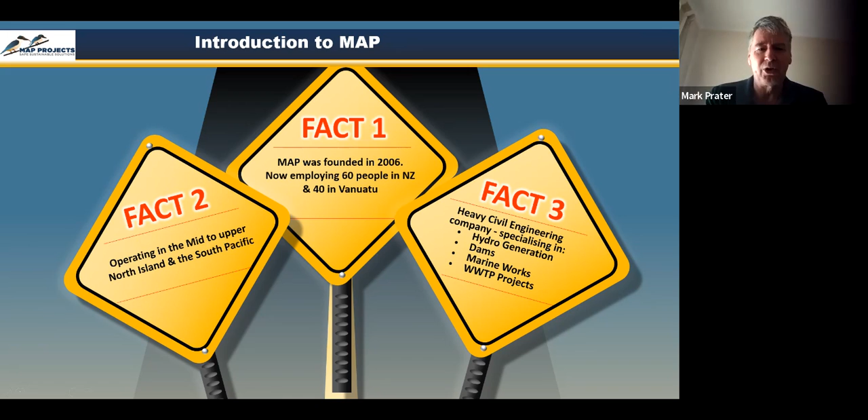Very much broad-based, heavy civil engineering. We don't build roads, we don't generally build subdivisions, but they are part of our skill set if we need to, because they're part of a larger project.

Andrew, who's our commercial manager, has put together a pretty good explanation of where MAP's heading over these next slides, and some of our core values, and what we're trying to encourage throughout the business and get better at year on year.

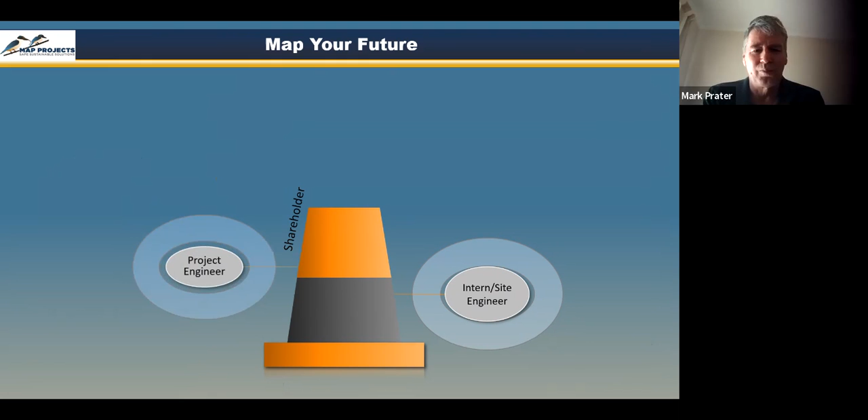I can talk a little bit about this if you want, Mark, in terms of the career progression we probably look for with a graduate - starting as an intern with holiday work, or coming on board as a graduate engineer or site engineer, then assisting on projects, assisting the project manager, learning basic project management skills in terms of plans and planning, set outs, materials, contract documents, reading and understanding those, day-to-day management of the site, and controlling the work crews and learning off them as well.

We expect our new engineers to muck in and help out and work on the gear, work with the guys, understand the practical side of what they're building and how that marries up with the technical knowledge. We think that's quite important going forward, so people can really understand how we build things and how the work crews actually put these things together off a plan.

Leading health and safety is a big element there, making sure the quality of the job is maintained with the systems, and then preparing reports and all that sort of stuff. Throughout that process, it's just getting more experience over the years, or months I suppose, depending on how quick people move and how quickly they pick things up.

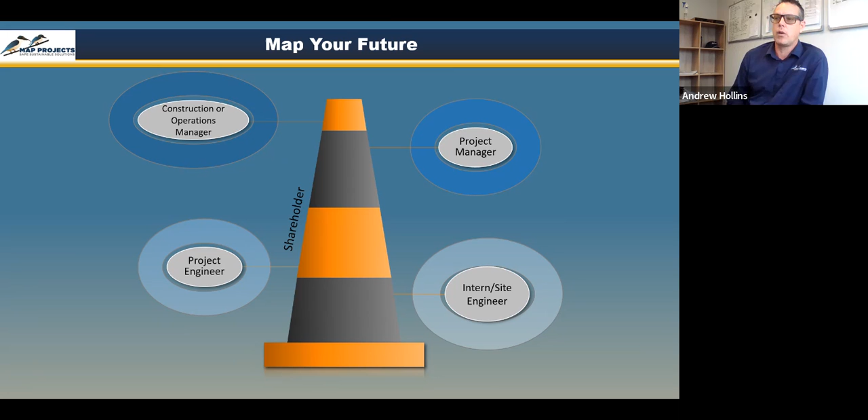I started as a site engineer back in the UK, then came on board with a company over in New Zealand, Higgins, building roads for 10-12 years as a project manager. Worked my way up through that system to construction manager, then construction manager here at MAP, and now commercial manager. There's a lot of different avenues you can follow, but project management gives you all the basics that cover those roles and a real good grounding to step into anything else as your career develops.

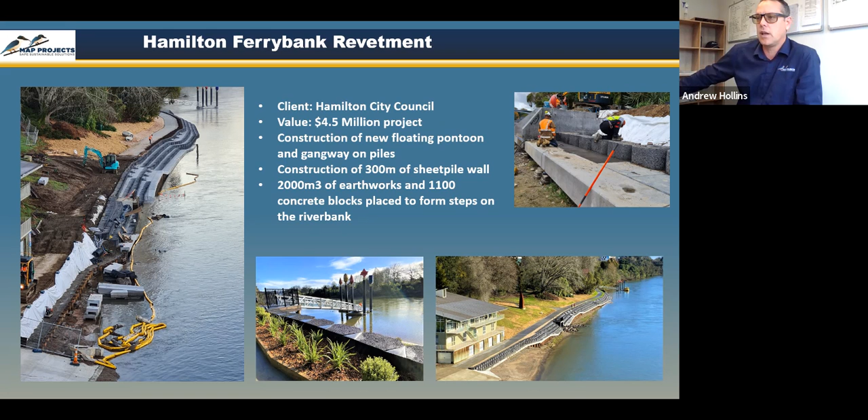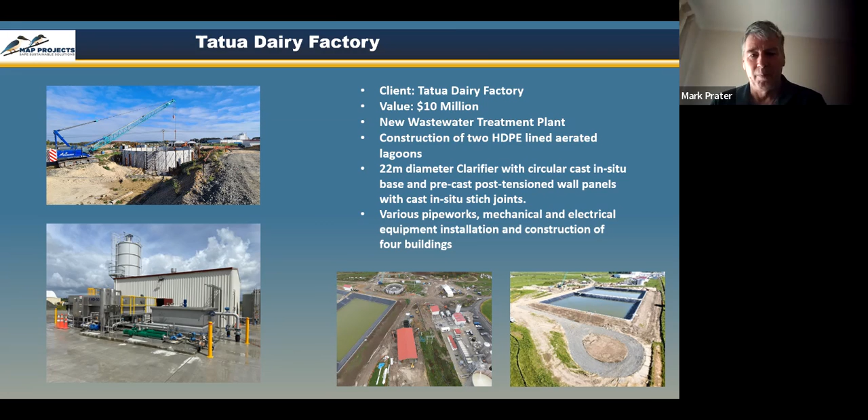Okay, and we've just got a video here of one of our young site engineers talking about his experience with MAP, and how he's come through the ranks, I guess - hopefully it'll be quite relatable to some of you who might be interested in coming on board.

Hi, my name is Patrick, and I'm currently studying civil engineering at the University of Waikato. I'm working part-time for MAP Projects while I'm also studying.

While I was on that job, the project engineer / project manager knew I had done fairly well in school, and I was looking to go back to university, so he started giving me little engineering-ish jobs to do while I was on that project, like reading the plans, setting out GPS work, as-builts, QA, and that sort of thing, as well as pricing up variations.

So towards the end of that project, I was working pretty much half-time on the ground and half in the office, learning all about what it's like being an engineer and a project manager.

After that, I moved over to Aotearoa to work on a dairy factory extension. I did pretty much the same sort of thing there, and then went off to study at university.

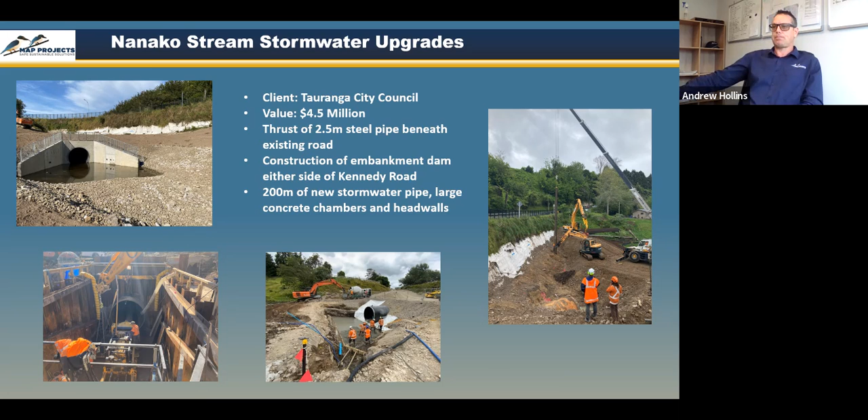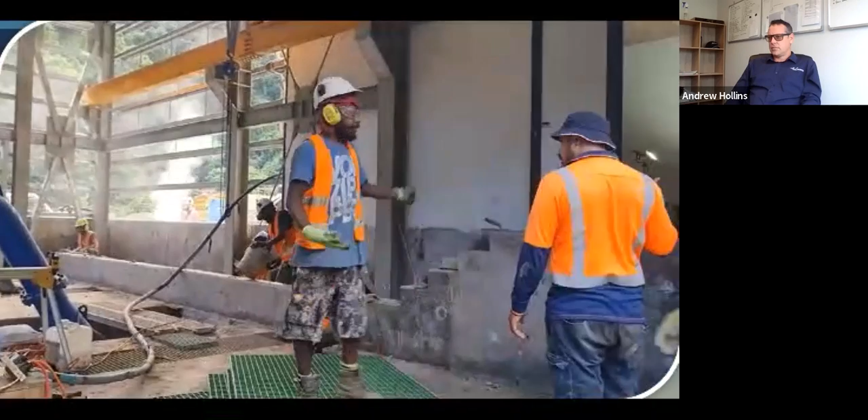Hi, my name's Baden.

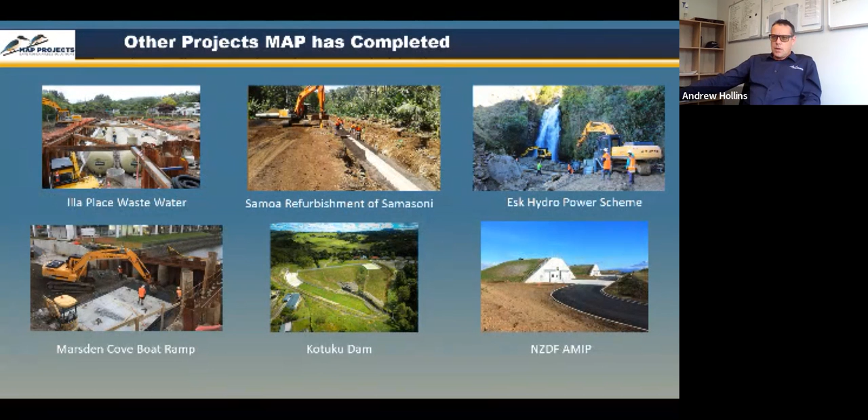So there's another couple of jobs here - I don't know whether Mark wants to talk about those. We're probably a little bit pushed for time, but yeah, just some other similar sort of projects we've done in the past. I think we just keep ticking on, Andy.

We've got another video here of Jono, who's one of our project managers - again just with a bit of a lowdown of how he's come up through the company as well, and his experience.

G'day, my name's Jono. I've worked with MAP for about 2.5 years, and right now I'm underneath the Rangipo Dam in the central North Island, and I'll take you for a little tour in a second.

We're undertaking some repairs to the basin of the dam, to the sluice basin, and we're about a third of the way through the project.

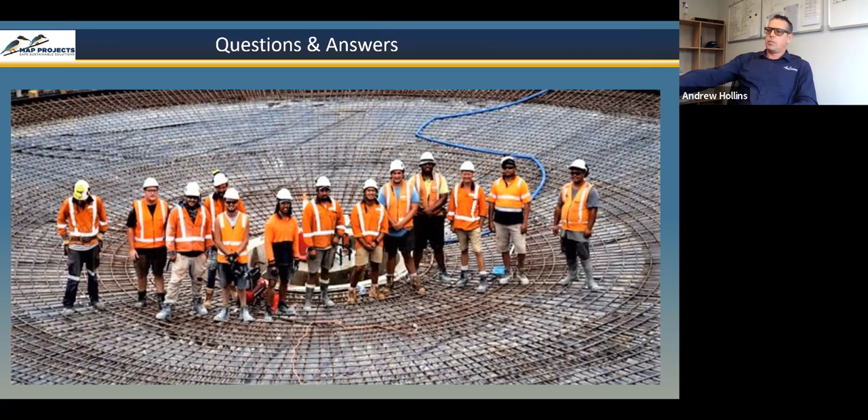I'm not sure if there's anyone listening that wants to ask any questions. I'll just jump out of this presentation so I can see what's going on in Zoom.

You've just got one in the chat there. Can you see that, Mark? Sorry, I'm just trying to reorganize my screens to see this stuff.

How many intern roles do we have, like what Patrick did? So like Mark mentioned, I think we're looking for 2 grads, correct, Mark? And then, yeah, potentially holiday interns as well, just to get experience and hopefully get a bit of a flavour of what MAP does.

South Island, we haven't got anything there at the moment, but that's not to say that won't be the case in the future. It really depends on what comes up and our appetite for the type of work. We're certainly up for a challenge. We go out to the islands, so there's certainly no reason why we won't be in the South Island if the right job comes along. Would that be fair, Mark? That would certainly be correct.

The chemical and process engineers, I'll probably defer to Mark a little bit on that, just in terms of what the opportunity might be in that space or not. Process engineering is certainly part of some of our deliveries, and what we like to do again is give people an opportunity.